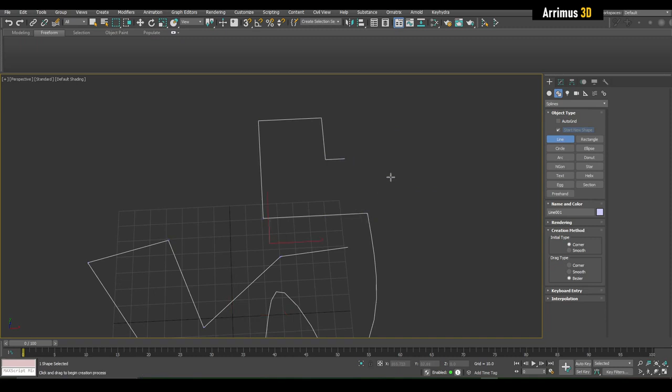Now one thing I like to do to match things up is I'll right click to exit the spline creation, then go into the modify tab, into vertex. Here's what you do: press S for snaps, you also can right click here and make sure it's set to vertex. And then also we have something called axis constraints, the default hotkey for that is Alt-D. So essentially, press S for snaps and Alt-D, and make sure the X-axis is active.

So I've got that spline set to Shift 1. I press Shift 1 and I just go into spline, line mode. Shift 2 is circle, Shift 3 is rectangle, Shift 4 is box, Shift 5 is cylinders, Shift 6 is planes, Shift 7 is spheres.

So guys, let's go over some brief design things to keep in mind. In this video series, I want to pack as many tools, knowledge about tools, how to use the tools, and also how to design things as well. So one rule about design is that you don't want to keep things too consistent here. One very boring thing is just this kind of box right here, so let's make it more interesting.

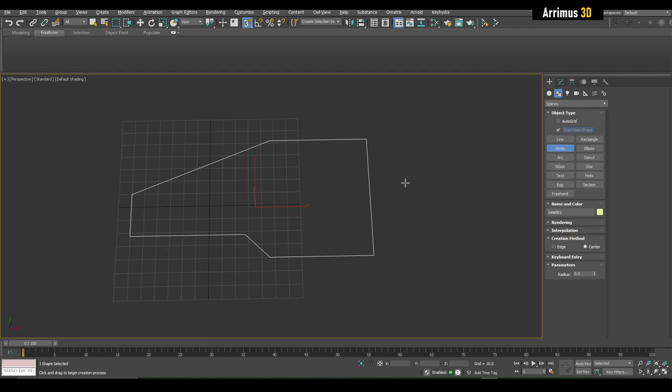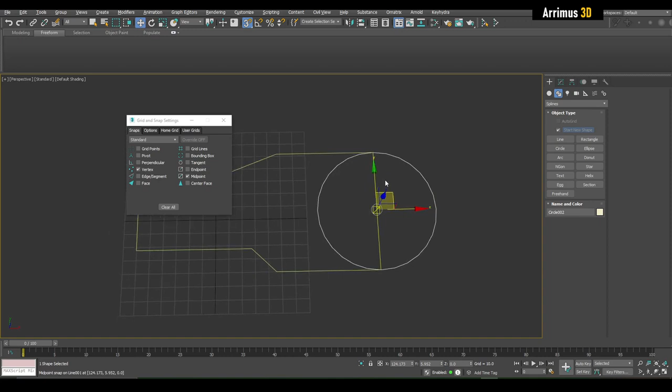Match this up. Next I'm going to press Shift 2 for a circle. How can I create a circle right in between here? Well, we can right click and use midpoint right here. And then, as you can see, we're now starting with the midpoints of all of the spline segments here. So I can start right here, and then I can end right there. As you can see guys, 3ds Max just has some very nice spline and snap settings as well.

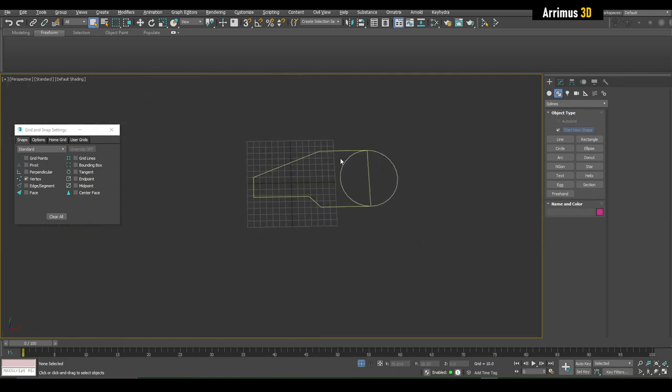Alright, another very nice option about 3ds Max is using trim. But before I trim, I'm going to go ahead and hold Shift while scaling to make a copy of this. I'm going to select these objects, and press Alt-Q, that's the default hotkey for isolation. We can also just press G real quick to turn off that grid, because when you have a lot of lines and grids going through here, it gets a little bit more complicated. So we're just going to press G to turn off the grid temporarily.

Okay, we're going to select this object. As you notice, when you start with a spline, it has all these options right here. However, with some primitive splines, as you notice, there are no options. We can't go into the vertices or anything like that. We have to go ahead and use Edit Spline.

Let's go ahead and set up a quick button for that. We're going to go into Configure Modifier Sets. A lot of people ask me these kinds of questions. I think I covered this in one of my very early 3ds Max videos, but I think we could use a good refresher on that just for the new people. Right now I have 10 buttons here. Let's give ourselves 14 buttons.

You can just look on the left right here. You can press, for example, ED to get edit mesh, edit patch, edit poly, edit spline. We can just drag that right into here. Spline chamfer is also another good one here. Actually, let's have spline mirror. I'm going to enter in SP. That gives us spline chamfer, spline mirror. Let's give ourselves some more buttons here. Let's have spline mirror, put that right there, and then we have spline chamfer, let's put that right there. And let's also use normalize spline as well. I'll show you why that could be useful. Click on OK, and here are our new tools.

So if you start with the circle, guys, you need to go ahead and apply edit spline to give yourself all these tools right here.

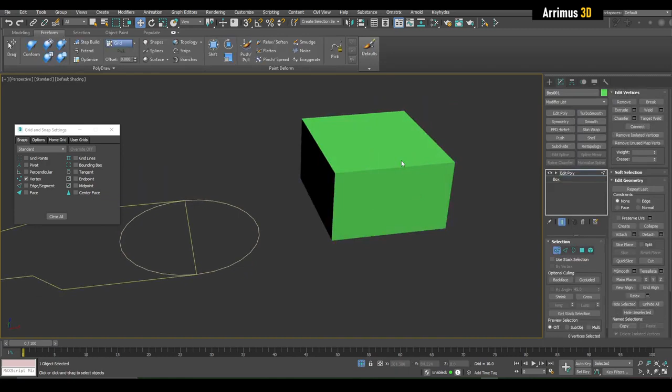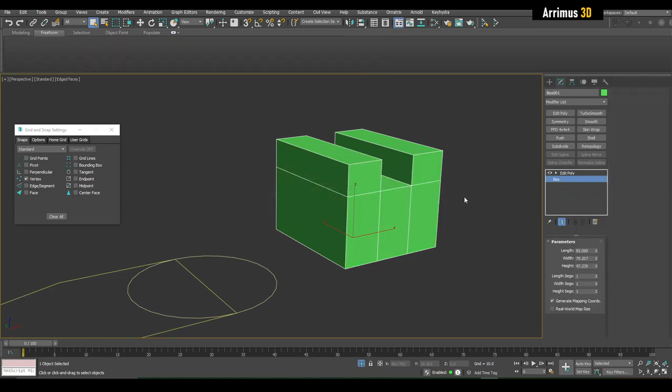Now, guys, when I'm working with polygons, I like to use lots of edit poly modifiers. That way I can put the new change on this edit poly, then go on to this one, add some more changes here. So now if I don't like it, I can just delete that right there. I can also delete the center one, and although that's not recommended, it actually does work in many situations, so we can delete that one as well.

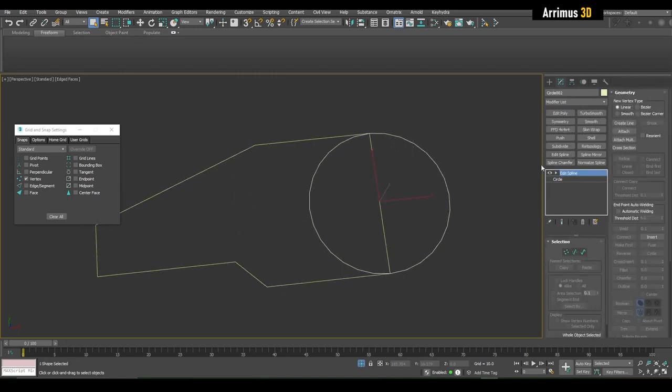So just as when I'm working with edit poly, I like to use lots of edit poly modifiers. When working with geometry, when you use splines, you can use lots of edit spline modifiers, and that way, if you don't like what you've done, you can just delete it and go back to the base right here. So I'm going to select this object and use edit spline. And what we can do, guys, is actually attach these objects together.

Next, we can go into spline, and we can use trim right here to get rid of parts we don't want. So I don't want this line, I'm going to left click on that. I don't want this, I'm going to left click on that, and there it goes. Right click to exit out of any kind of modes here.

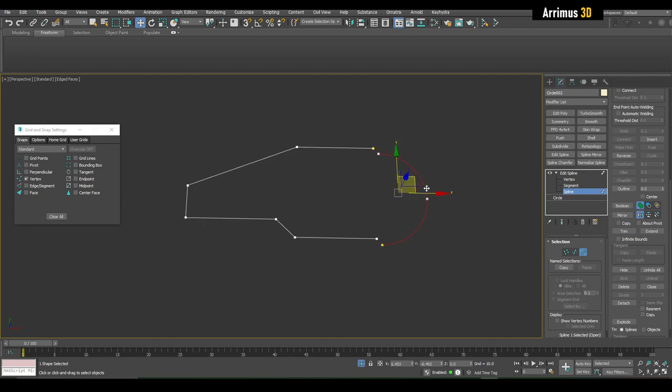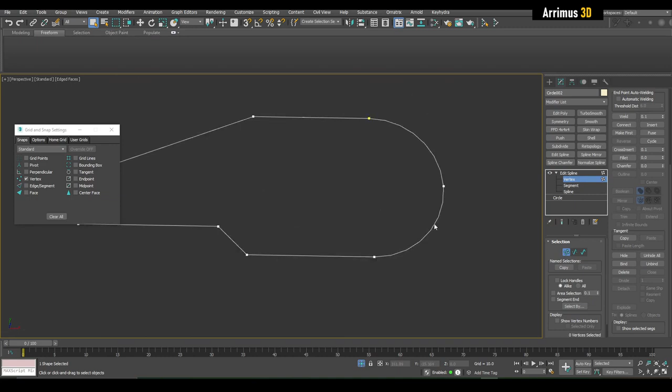But it will still be split up here. So we're going to go into vertex, Control A to select everything, and we're just going to weld right here. Now if you go into spline, you should notice it's all a single thing right here. So if we go into the vertices, you can see we have 1, 2, 3, 4, 5, 6, 7, 8 here. Sometimes for different operations, you will want more vertices right here.

So for that, you want to use normalize spline. Let's go ahead and use that. You can see what it does - if I apply edit spline on top, you can see how it tries to give ourselves even vertices.

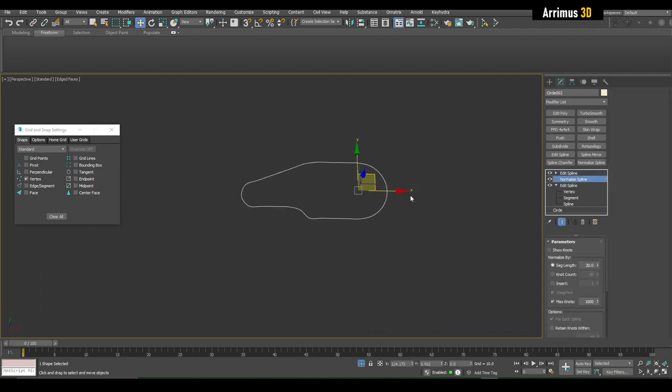This can be very useful, for example, if you're creating wires. So let's say you create a wire like this, and you just have these kinds of sparse control points here, and maybe it's not enough to get the exact shape you want. So you use normalize spline, edit spline on top, and look at that - we have all of these control points.

Once again, 3ds Max remembers which axes you use last. So all I have to do, guys, is just left click and hold, left click and hold - you don't have to select. What I used to do is select and then left click on which axes I want. But remember, once you've got the ones you want, all I have to do is just left click and hold - you can very quickly adjust things like so.

Alright guys, so sometimes the gizmo does kind of get in the way. For example, if this is selected and I try and left click and hold, let's say I want to move the vertex next to it - well, you can see if I try and do it, it just keeps getting into that one. I kind of have to deselect it first, which slows things down a bit. So let's go ahead and set up a hotkey for turning the gizmo off if necessary. Let's go into Customize Hotkey Editor.

Alright, under Actions, let's search up Gizmo. Here it is, Show Transform Gizmo, which I've set to F8. A lot of times people accidentally turn it off, but it can be useful to turn off sometimes. When I press F8, first I want to make sure it's on so I can define which axes I want to work with, so Y and X. Now press F8 to turn it off.

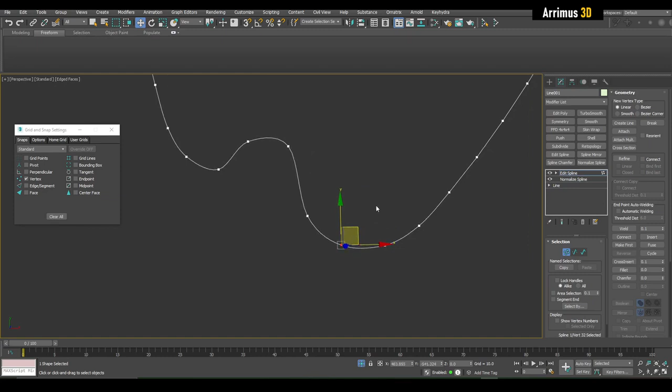Now I can just left click and hold, and this gives you a nice fluid method for quickly selecting and moving things. So that is where normalized spline can be useful, guys. Give yourself a bunch of vertices, and now you have much more control over what you want to do. That's how it can be used.

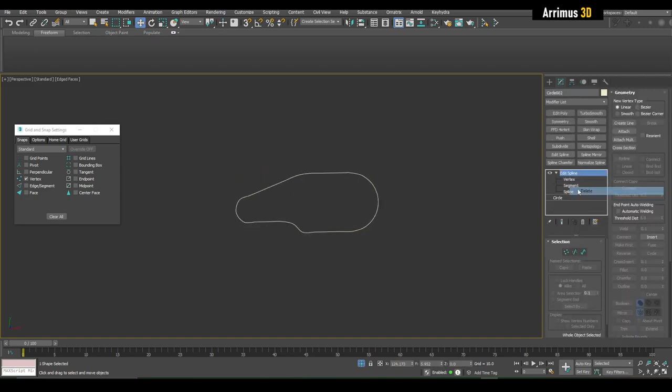Next we have spline chamfer, which as the name implies gives us a chamfer, and we can use an amount right here. As you can see, it's being chamfered, and this is all nice and procedural. If we do edit spline, select this, and chamfer or fillet it, this is not real time, we'd have to delete it. So I'm going to undo that, but with spline chamfer we can easily change it like so.

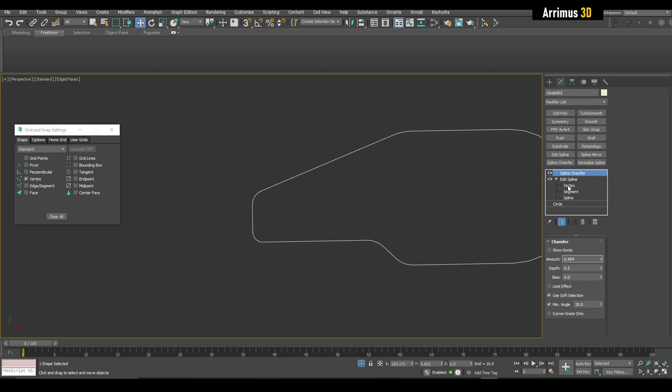We can also use 3ds Max's nice stacking tools. If you select these two vertices and left click on spline chamfer, only those two will be affected, none of the others are affected. If you want to get rid of this behavior, go back to edit spline, deselect everything, or click here - that little graphic indicates it's using the stack beneath. We go into vertex and click that, that graphic indicates it's using the stack beneath. But if you just click on edit spline, that graphic is gone, which means now all the vertices are being affected.

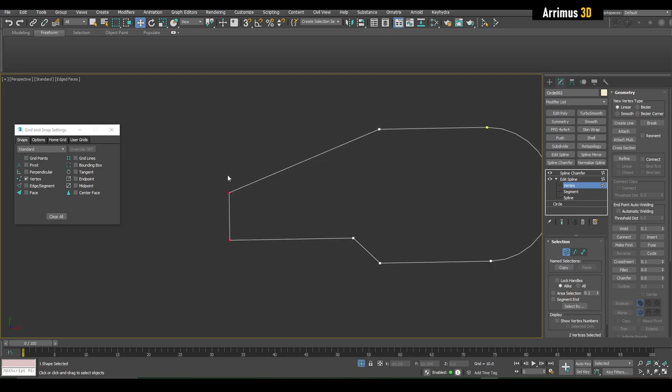I very much like 3ds Max's intuitive system for stacking up details and only affecting certain things. It also works with segments, so if you select these segments and click on spline chamfer, now only those segments are being affected. This is one of those things that is very handy to know.

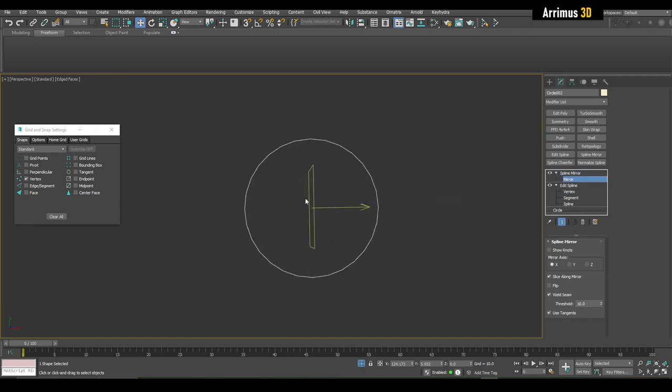Alright, and we also have spline mirror as well. So we can click on spline mirror, then go into mirror. I've got the gizmo off, so I'm going to press F8 to turn that on again. Now I can move it like so, and now we have real-time mirroring happening. If you want to see that, make sure you've got this button pressed, show end result on off toggle - I've got that set as the space bar key, you can set up a hotkey for that. Now we've got the nice real-time spline mirroring happening.

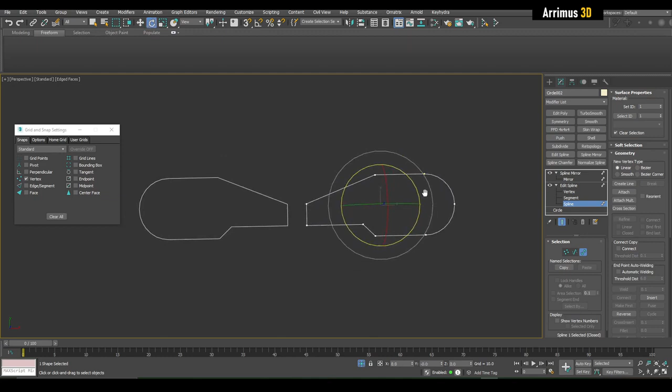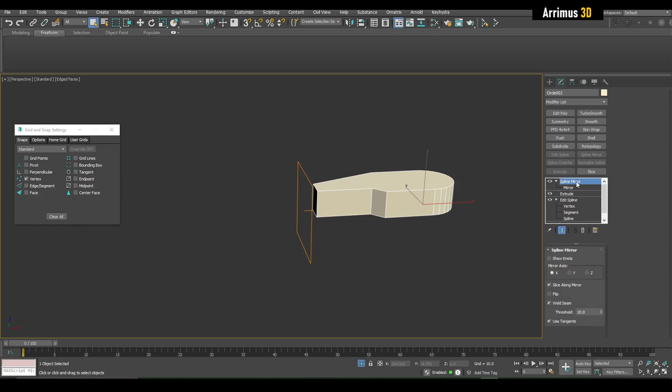Next we also want extrude. Let's add one more button here for extrude, and I'll add slice as well. Alright, so extrude - we'll take that and extrude it like so. But now you notice spline mirror doesn't work anymore because that's only for splines, not geometry. Once you extrude it, I'm going to make this yellow because I'm making kind of a construction type vehicle, so I want a yellow color scheme. Before you set up materials, you can use object colors to define basic color schemes. What you can do is put extrude on top of spline mirror, and then it'll work just fine.

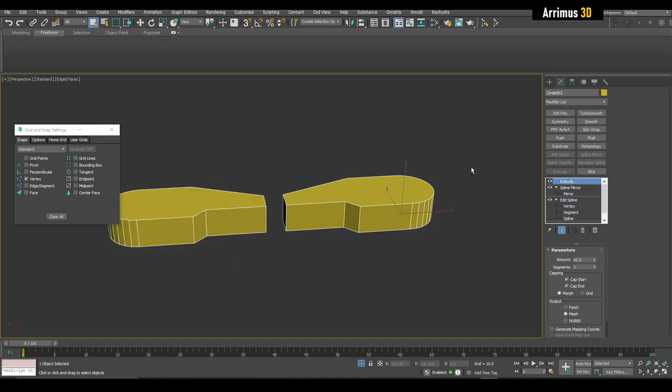Alright guys, remember that circle spline that I hid previously? Let's exit isolation mode by pressing Alt Q again, and close off our grid and snap settings. When I'm working, I think it's a good idea to keep this on here so you can quickly activate various snap settings. Alright, I'm going to go ahead and turn those off.

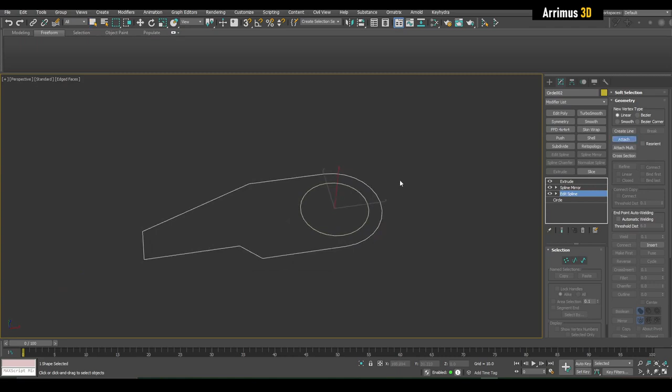So here's a nice thing, guys. Right now we're getting this result, but if we want a hole right here, all we have to do is attach this, and now we have a hole. That is very simple.

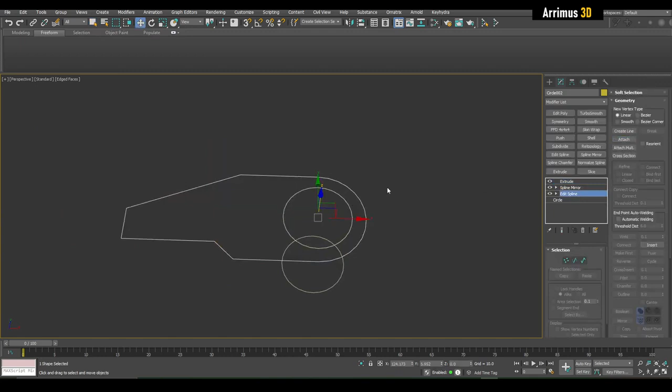And I'm going to undo that because I'm going to Control V that first, then move this down so it's not getting in the way, and attach this one. I'll move this back, and also apply extrude on this, giving it a dark gray object color. At this point we can turn off spline mirror, and I'm going to turn off extrude for now because I just want to focus on these kinds of shapes.

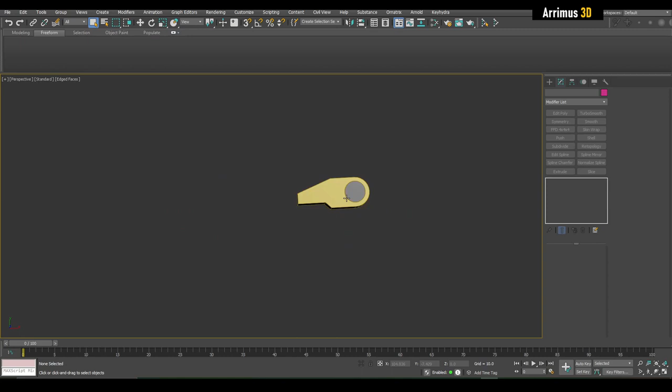Alright guys, I want to create some sort of crab arm here, some sort of mechanical crab arm. So first I'm going to just kind of move this, with the show end result on, so that allows me to see this right here.

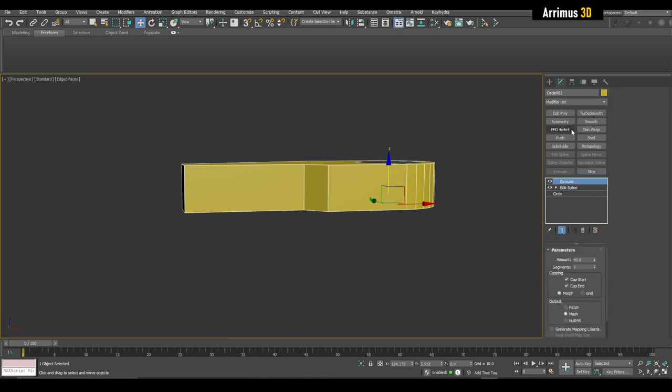All right, what I'm going to do is apply symmetry. And I'm going to move that down a little bit. And I'm going to decrease the value of this extrude.

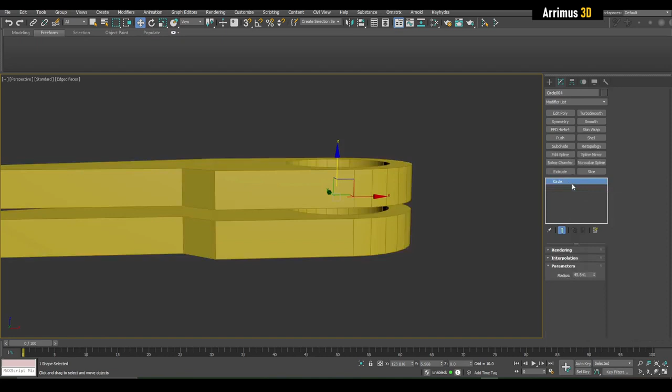All right, I'm going to copy. So what I'm going to do is select extrude, hold down Control or Shift to add modifiers to my selection, right click, copy that, delete extrude, and paste them right here. That way we've got the same settings in terms of extrude and symmetry.

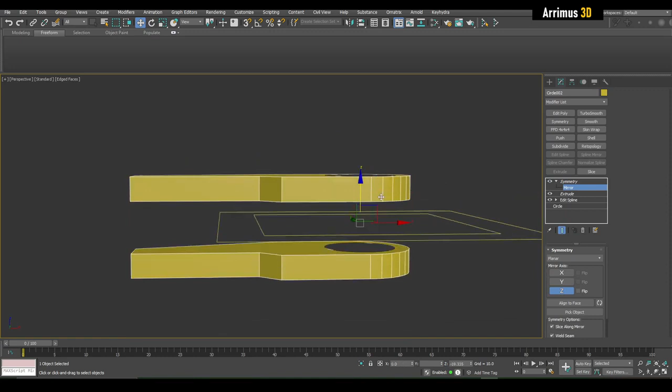I very much like how in 3ds Max you can simply paste modifiers right here. And what you can even do, guys, is paste them as an instance, which means if I go into symmetry and move that around, you can see now both are following the same settings. And if I change extrude, it's going to keep up with it as well. I very much like that too.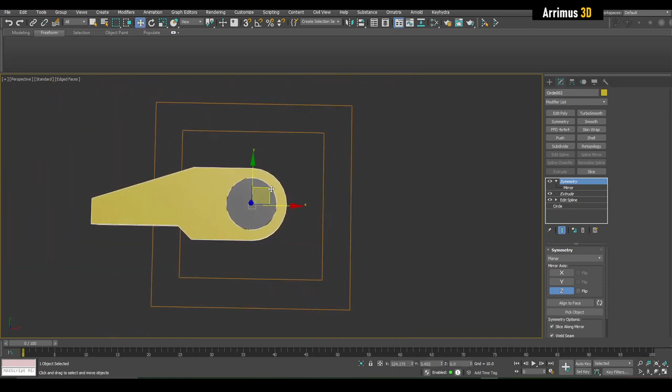All right, I probably want to also have something right here. So let's copy this as well. All right, let's turn off extrude for now, and symmetry as well.

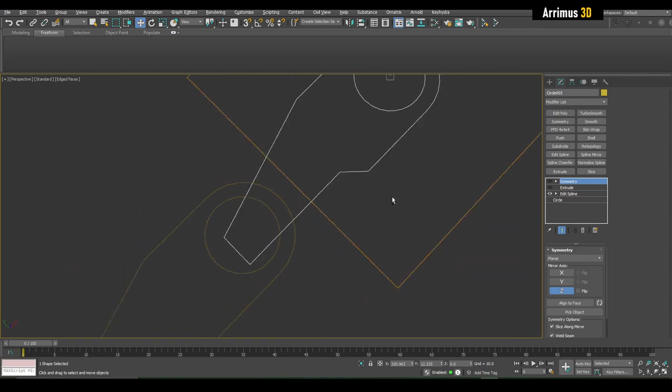Essentially I need to kind of work this out at this level. I'm going to have, let's say, a forearm type area. So I want to have a bicep type area, a forearm type area, and a claw right here.

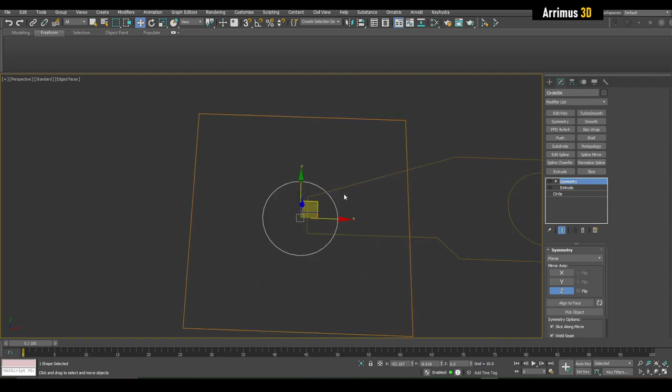Still got that here. So I'm going to go ahead and copy this here. Decrease the radius. All right.

All right, guys, I am going to create a line right here because I want this to overlap right here. So here I'm getting a slight curve, so I need to be a little bit more careful when clicking. Don't left click and hold down even a little bit, otherwise you get that curve. Just be a little bit more careful with my clicks here.

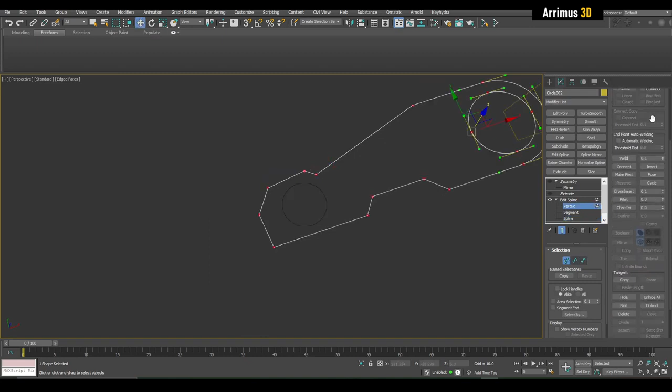I'm just going to get this right here, and then use trim. If you find yourself using trim a lot, remember you have to be in spline mode to use that. If you're in vertex or segment mode, as you can see, trim is not active—you have to be in spline mode. If you find yourself using trim a lot, you can set that to a hotkey as well. So I'm going to trim that away, trim this away, select everything, and do a quick weld. Let's see if I can move this a little bit here.

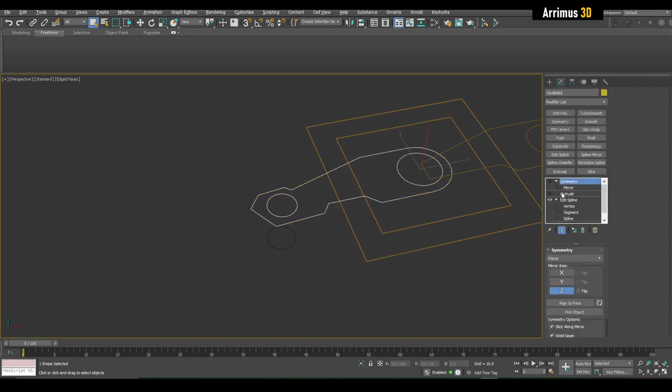All right, copy this down here, and I'm going to attach this. All right, guys, let's turn on extrude and symmetry again and see what we got.

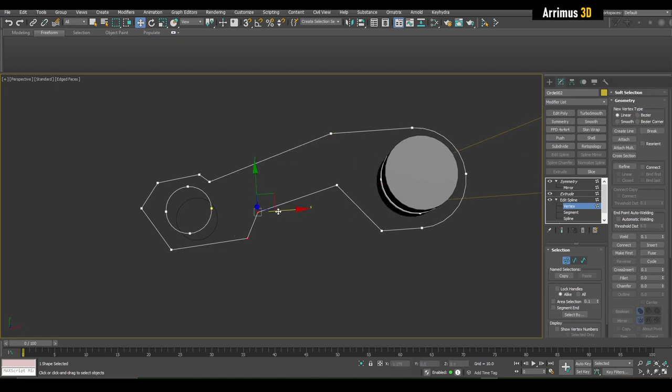Essentially what I'm trying to do here is just get something nice—right now I'm working this in a very 2D way, just looking at the top and seeing what kind of silhouette I have. I'm just playing around with creating an interesting silhouette right here. I'm also thinking about positions where I can eventually put some sort of hydraulic cylinders, so I'm creating little spaces for those as well.

If you're getting this kind of effect, you simply select your vertices, right click, and do a corner, and there we go.

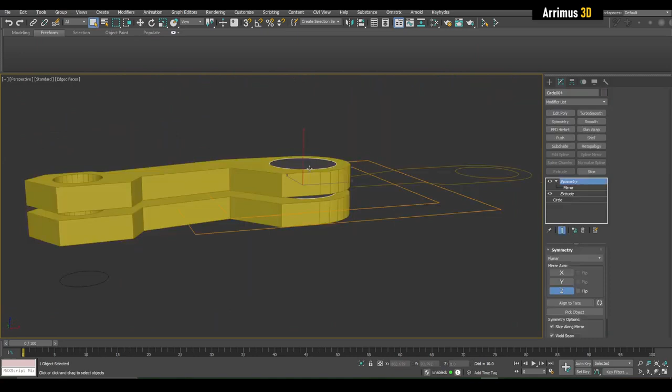All right, I'm going to go into the mirror subobject level. I'm going to move this further apart. All right, let me turn off extrude for now.

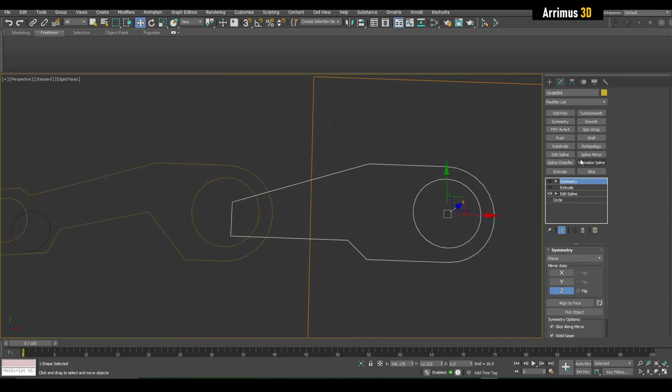All right, so now what I need to do is also do the same thing right here. Actually, for this, let's use the spline mirror. That's going to act as a very quick way for us to get rid of this effect right here.

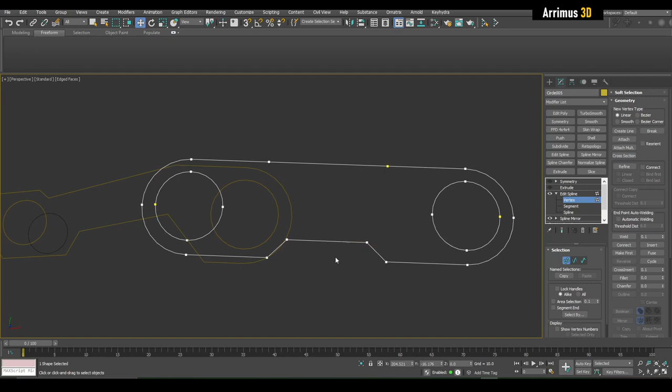We're going to put edit spline on top. We're going to go into the vertex level. We're going to delete this right here and delete that right there. All right.

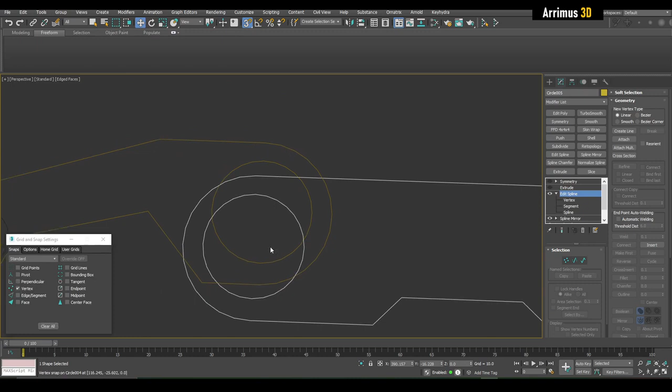So here I've just used my eye to position this circle carefully over this one. But what if we want to be more careful and position it exactly? Well, we just turn on our snaps again, making sure we're using vertex, for example. And we hover over this vertex and snap to that one right there.

And I'm going to select these vertices and move them right here just to make this a little bit shorter here, and then I will delete these vertices. All right, there we are.

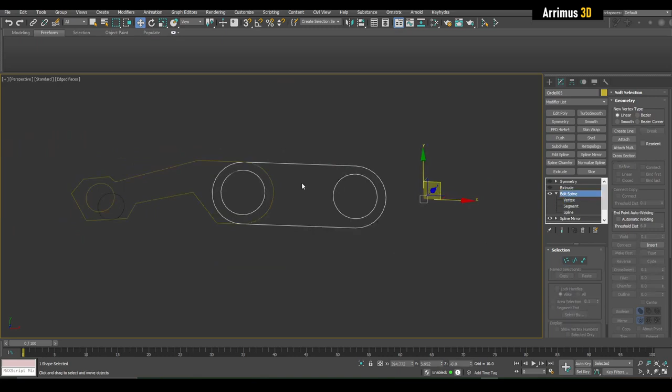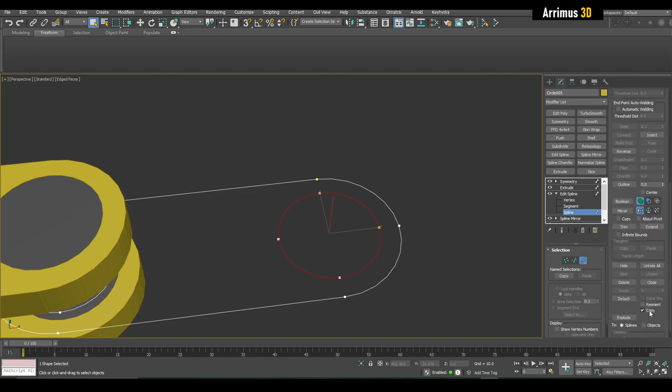All right, we'll go back here, select this spline, and go ahead and detach it. So we're going to click on copy, detach it, and now we will have a copy of the object right here. So we can extrude that as well.

Or rather, I will copy these settings here and apply them to this one, and change the object color as well.

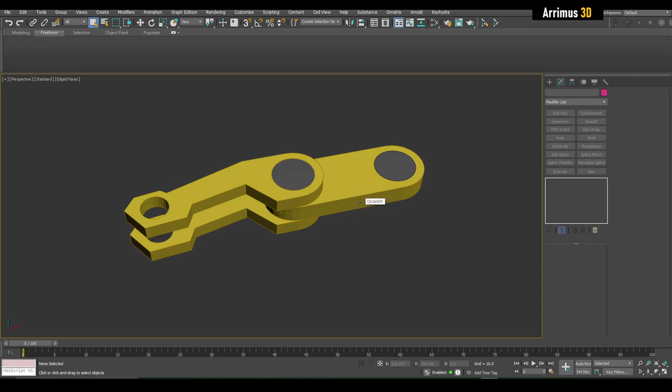Alright guys, we don't have that many objects here, but I showed you some good information that you can now use to work with splines faster, and that will speed up our workflow for the future videos. Thank you for watching, and take care.